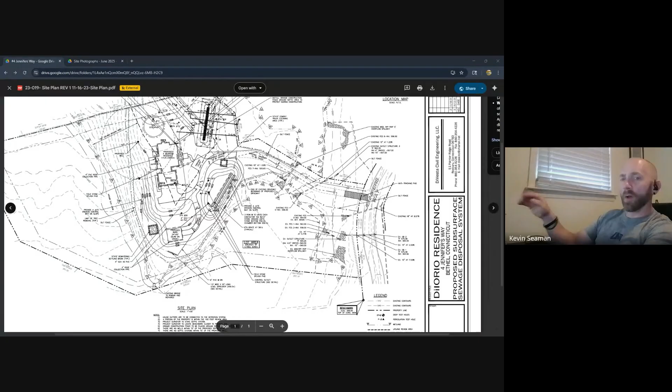Excellent. So just to clarify, the area of the property that was cleared - it was always the applicant's intention to clear cut the majority of the property, and that's what this commission had approved. That wasn't an issue when I went out there, it wasn't a flag that was raised to me.

For this commission's understanding, the prompt for me going out there was so the applicant can ultimately acquire a certificate of occupancy, a CO. So they can go to whatever insurance agency they're looking for coverage and say, I have complied with everything the municipal agencies at Town Hall have approved me for - the septic system, the single family dwelling itself, and the land use commission approvals, i.e. you guys.

So I go out there, I received an as-built survey, and I received a letter of substantial completion from Doug DeBesta. Both of those are in the Google Drive. I don't have any issue with what those show.

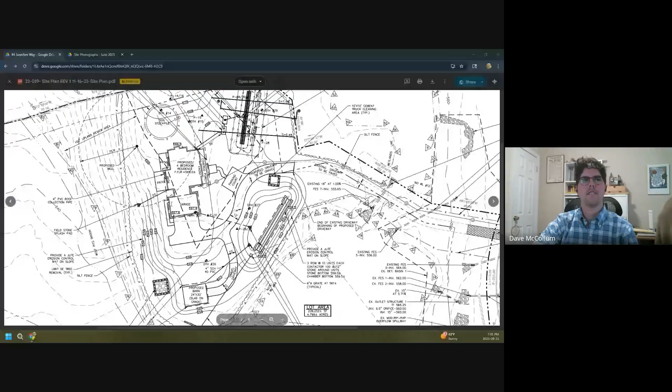The part that caught my attention, however, was - oh, you can't see my cursor? Let me try resharing it again. Okay, that's better. Can you guys see my cursor now? We see you, oh there we are.

Okay excellent. So the area that Mike is trying to share with you guys is this part of the property that is behind, due east of the completed single family dwelling, where there was some grading that was proposed and approved to be done, to bring the area that was proposed to be filled back in line with what the existing contours are. That's what Mr. Diorio is describing to you guys. So that's the area I'm focusing on in the photos I'm going to share with you.

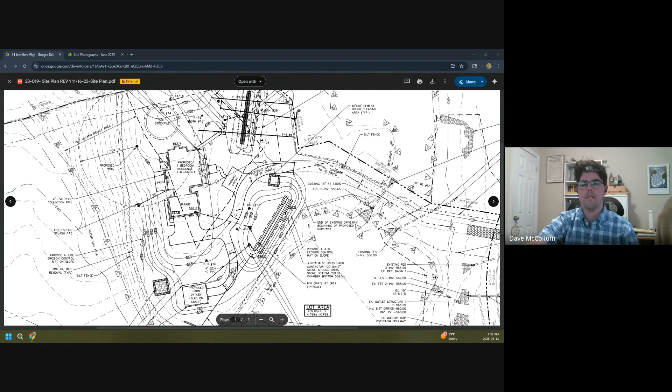Okay, let's bring up the photographs. Let me know if you guys can see these. Yep. Okay, so this gives you as accurate an idea as I could show through a photo of what has happened, or what the final conditions are, and compare that to what this commission approved.

When I went out there, based on what I saw, the area that was proposed to be graded out here - my observations suggest that it's different. And that's not for good or bad, it's just an observation. It is worth noting that there is a silt fence line that roughly follows the water course, extending north-south on the property.

Just for this commission's clarification, there did not appear to be any immediate concerns in the way of adverse impacts to the water course out there. Okay, the silt fence was operating.

I noticed in this picture that the silt fence seems overrun there as it is.

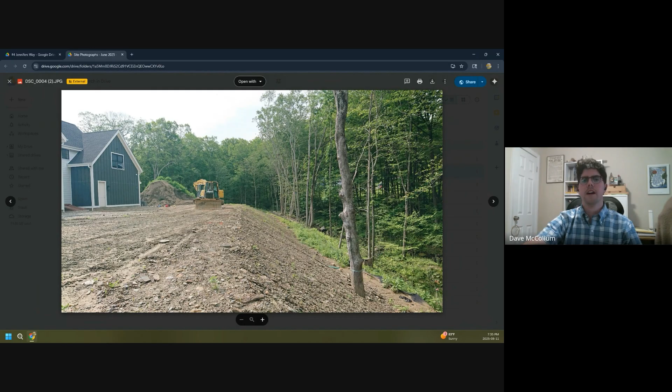That is a good question. Let me try to find... I saw a photograph with the measuring tape. Does it go past the house to the north? The grading?

So my measurements weren't based on comparison to any other structures that were out there. I did mine based on what the site plan showed, and when I measured out from the corner of the garage to where the flat area extends to, going due east, it measures roughly 42 feet.

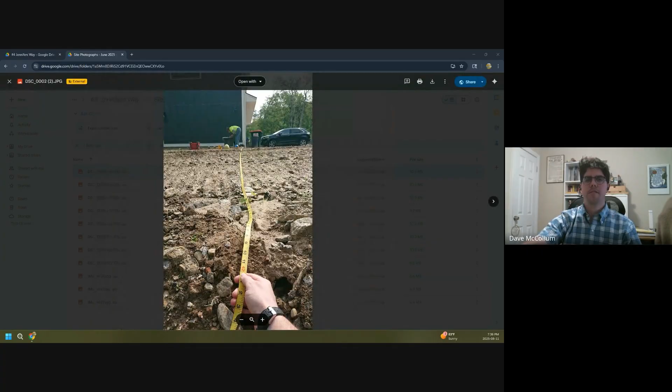The comparison you guys should make is, okay, that's a number, but the context is where is that in relation to what this commission approved, and what difference does this ultimately show? So I'm trying to find the scan that I made for you guys.

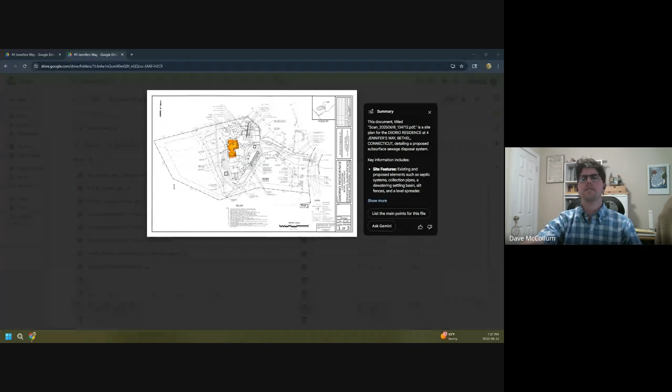Okay, this house, explain it, Dave, right? Can you please tell him? Yeah, thank you. I would, can I just finish what I have to say, and then I would welcome any response that you have.

So I overlaid the as-built survey that the applicant surveyor submitted to show us where the house is going. No issue with that at all. It seems to jive pretty well with where they had originally intended the house to go. So not an issue for me.

The point that I had expressed was, okay, let's take where the house is, because we can see that, and let's try to get an idea for how far off from this corner of the garage, which is where I measured, to where the slope begins. Looking at the site plan, that number's roughly 15, 16 feet, I think is what we came out to. It's maybe a little bit more than that now, because the house looks like it shifted a little bit to the south and to the right, so it's a little farther away from the silt fence section here that you guys all saw in my last photo.

So the prompt for me to do this was, okay, I can authorize some minor changes, emphasis on minor, that an applicant chooses to make in the field, especially when it's beyond the regulated upland review area. If it's really inconsequential to what this commission reviewed, I'm not going to entertain it before you guys. I want to try to streamline things and keep them moving. So in those circumstances, I just handle those myself.

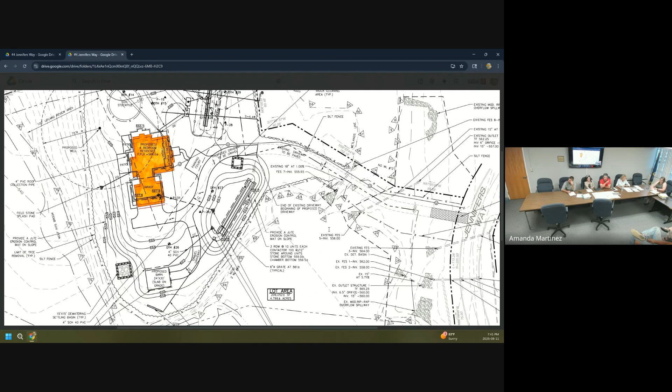The level, looking at the flat side, the bottom of the slope that was changed—is it still at the same location? So the end of it's still where it is. You basically went out about 10 more feet flat with a little pitch, it looks like. So that slope is a little greater, and that's what we're talking about.

We have a bond in place for erosion sediment control, which we hold until it's established. Agreed. I have to say, being on numerous construction sites, this is not unusual.

It's not unusual to have an extra 10 feet around the house flat. With building plans, you try to get as close as possible to build them, but they're still a guide to express what you're trying to do and how to do it. It would have been nice if it matched exactly, but every building will have some type of modifications to it, because as you're working on it, things change that you cannot anticipate.

I think my question is, the plan the way it is—number one, does it affect neighbors, does it affect the water, or anything like that? And number two is, would I have approved it being the way it's done now? That's what I look at with something like this.

I think safety-wise, it's better to have more in the backyard, because if people are back there, you have a backyard, you're not falling off a cliff. I would advise, I don't know the pitch, something like a fence, some border there. Can you show the picture again, for safety—that's all. But again, that's my two cents.

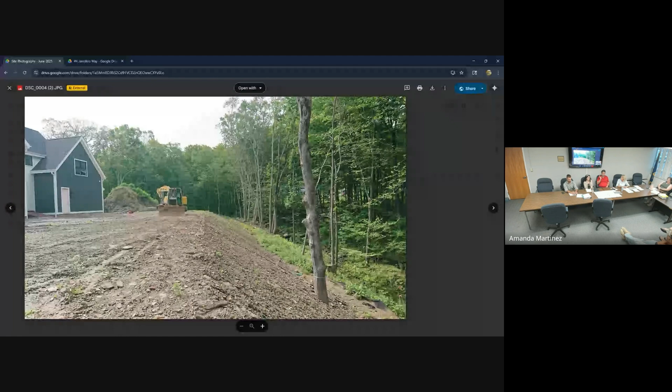I think it would favor for Dave, whoever, maybe - I don't know how long it takes. I have trouble growing grass, trust me, I'm trying. When it's seeded, grown, finished, if you can take a picture and send it to us. So yeah, just - can't we go out and look at it?

In order to go out and look at it, we need to organize an official site walk. We need permission from the owner, and it'll be closed by then, so we usually do our site walks before. We could request that. The adjoining property is Bethel Land Trust property.

We'll just reserve to go see the site. It's a little ways off from the property line, south end of the property. People walk through there. You can-

Because not on - just for the record, that's Don Good. I have to do that. Don Goodrich speaking, former chairman. All right, so

Dave, where do we go from here? Well, what is ultimately being sought is, for lack of better words, an okay from the board that the applicant can go forth with the modifications that they've made. I'll go ahead and take a read from everybody on how they feel about that, whatever they haven't voiced yet.

I'm gonna ask you though, are you comfortable with the way this has landed? So the distinction for me is what work was done. Is it stable? Is it adversely impacting any on-site regulated wetlands? And does it increase the area that the commission approved to be disturbed? I'll try to answer my questions in reverse order.

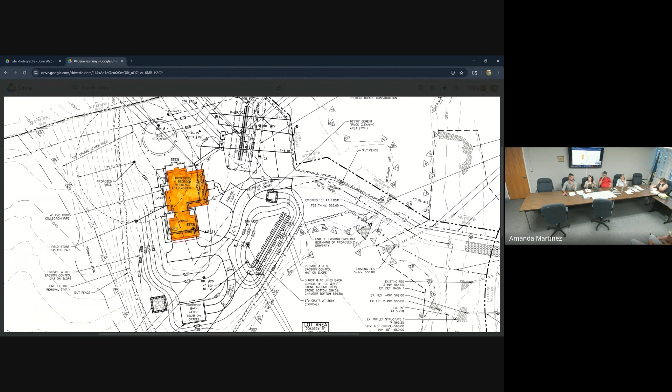There should be a motion made. This commission should first come to a consensus on whether or not to approve the modification as it's been presented to you guys tonight. Then you should formally make a motion on whether or not the commission is okay with this, with the modifications, if there's any conditions that need to be made, or if the commission feels otherwise, they should indicate that.

Thank you, sorry for the interruption. You wouldn't need to draft anything in addition to what we already have, as long as we give our approval? Well, assuming we give approval, there's nothing else that needs to be drafted or signed for next meeting. This could be resolved today.

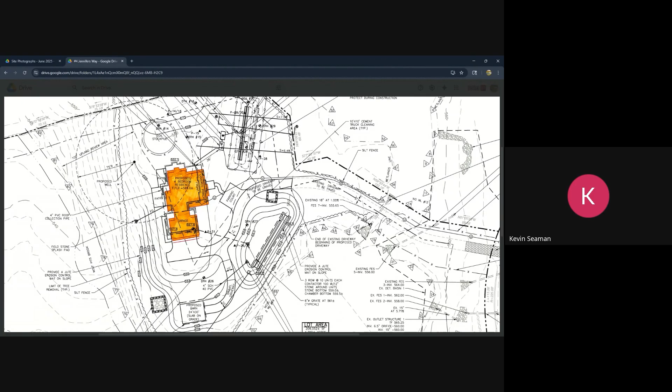Yeah, that's the way I would read it, Kevin. If I'm looking at the regulations, it doesn't say anything has to be done in writing, like a formal approval per se. I would add something to the file to reflect this commission's decision, but I don't think it would be anything you guys would have to read beforehand, just so the language is set. Agreed, that's what I understood too. I just wanted to make sure I didn't want to make the assumption of being correct.

Dave, I'm not sure about this. Maybe this isn't personal. Is it appropriate for Terry to weigh in on this? Probably not.

I don't see why she couldn't participate on this. I understand that while she may not have been part of the original application per se, it's a modification. It's not like Terry's coming in at this at the 11th hour. This is just being presented for the first time to everybody tonight.

Okay, fair enough. So then, Terry, if you want to vote, you may. If you're not comfortable, you can abstain, and that's entirely up to you. All right, so can I get a consensus? How are we all feeling? Let me start on the screen.

Kevin, how are you feeling? I'm feeling like an approval is definitely adequate for this. I really don't have any questions or issues with what's happening. Thank you, I'm going to just take the consensus and then.

I have a procedural question. Dave, I have a procedural question for you. What does it mean? I understand we can vote to approve. What are the ramifications if we do not?

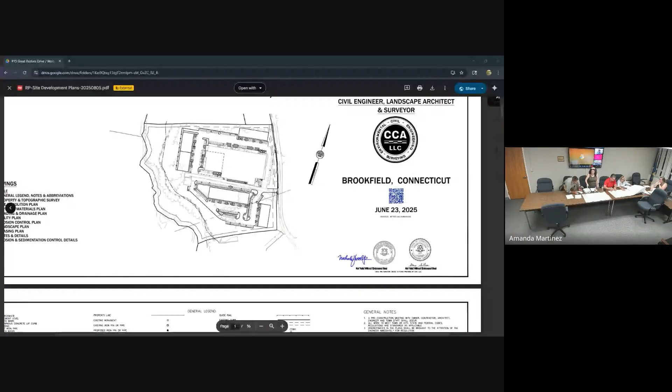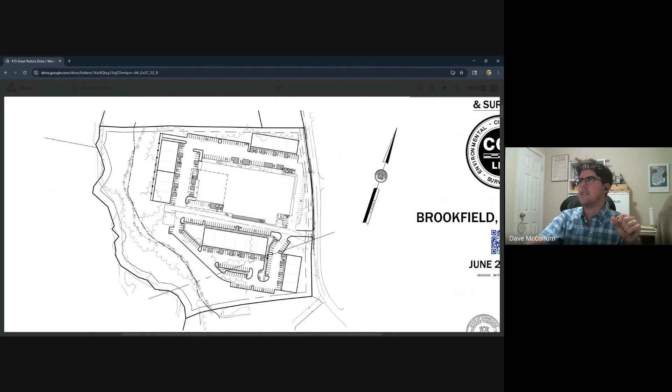I will offer some comments for clarification. I'm not trying to present the application in any way, but the only part of this application or this site development plan that you're focused on is what is in this area right here, because this is what's in Bethel. Everything else to the north here is in Danbury. That's why this property has a Danbury address, because that's where the driveway is, just over the line in Danbury.

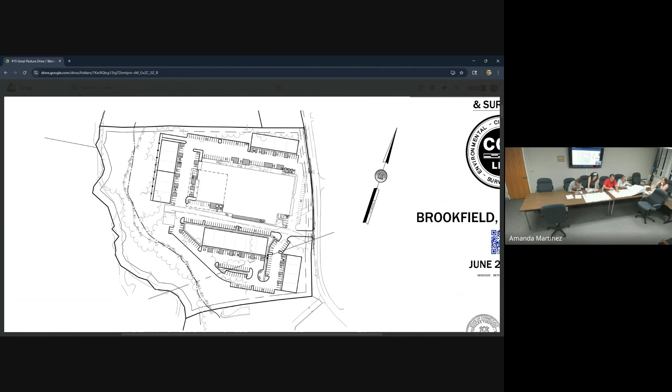Dave, help, is this a new building or is this a building that's there? That's a good question. Some of it exists. I know it's an existing building, and they're building more. So the existing building is here, okay?

I don't see the cursor. Sorry, can't see your cursor. Sorry, the one concrete block, building number 15, is there. Hang on, recognize it. Okay, can you guys see my cursor now? Yes.

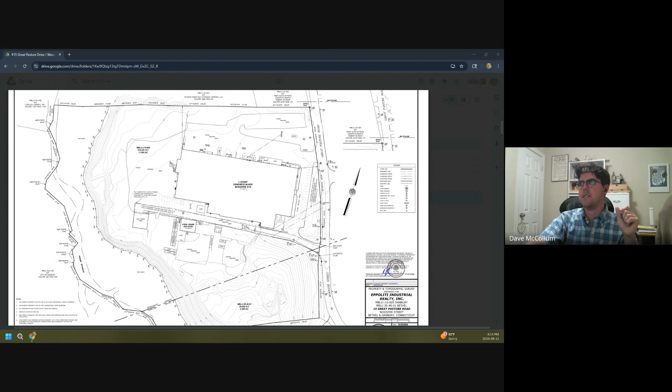So the existing building is here. So what they're looking to do is keep the existing building as it is, and then add 4 smaller buildings around it. Only one of these is in Bethel, the southernmost one here, proposed building 4. This is the only part of this application that you guys have purview to review, because the town line is right here. Here's the buildings.

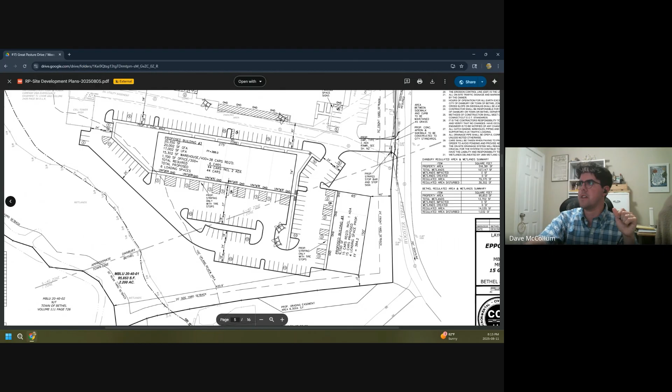Where's the one that's supposed to be here? Is this the town line, right? So the buildings in Danbury, Danbury reviews the rest. But the parking- oh, is that true, Dave? The building actually isn't in Bethel, but the parking is? No, there is a building that would be in Bethel, here, the proposed building. Okay, you put this building, correct?

So, furthermore, this structure is not within the regulated upland review area. The only portion of the property that is due west of the dash line here, of the 100-foot upland review area line, that's your URA. Your wetlands are way down here.

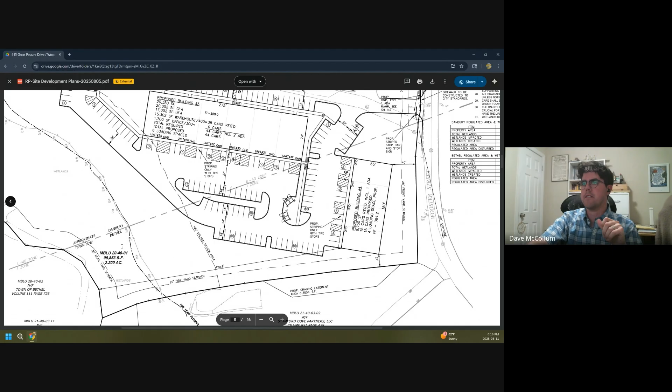If that's the case, because I see where the wetland review area is, I see the level of disturbance, I see where the building is in relation to the Bethel property line, does this technically fall under our jurisdiction? Yes it does, because the parking lot is now within 100 feet.

Right, the parking lot extends back to it. The building may not, but the parking structures do. So it's the associated improvements that are really your purview, being the driveway, the area of the property that would get regraded, and any stormwater or groundwater that would be altered as part of what is going on with the rest of the properties here.

So basically, we're here tonight to just familiarize ourselves with the big picture of what's happening. They're now presenting. We have to take a look at this and decide whether this is going to be site plan review or public hearing. What's the use of the site?

Light industrial is how the applicant categorized it. Do we know the name of the business that's occupying the existing building? No, and to be honest with you, that's not really of consequence, because the existing building's in Danbury.

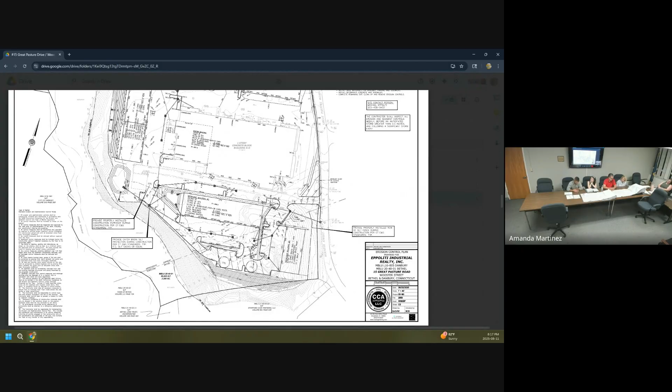I will say that there's a concurrent review being held by Danbury's Environmental Impact Commission. I can't recall which process Danbury's EIC opted to use to review this application, but the public at large wouldn't be at a loss to weigh in on this, either from the Danbury side or from the Bethel side.

Just to be clear, this is also going to go before planning and zoning. Your focus is on what the regulated activities are, which in the grand scheme of things, compared to everything else going on these properties, appears to be pretty small -- this tiny little triangle right here, actually.

Right, that's the area for the driveway. You also have the grading, and you'd also want to consider any changes to the groundwater hydrology for whatever that would be worth as part of the site development changes.

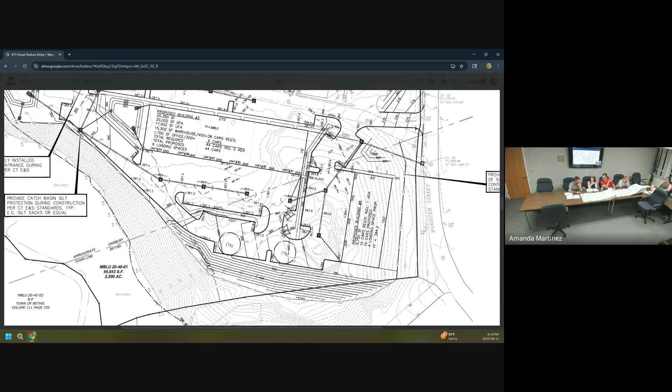Well, that's in our purview, so we have to -- what map are you on there? This is page -- yeah, but that's connected to bottom this. It's sheet C2. Two? Yes, sheet C2. Oh, these are all eights. We're on the same page as you. All right, yes, so that's what I'm looking for, the triangle right here.

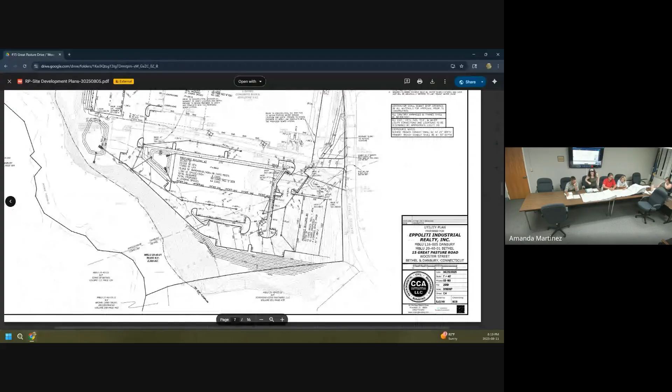That one, yep, is what we're reviewing. I'm just showing you -- this is Bethel over here, and this is where the 100 foot limit should be. I would think we should put trees right here, so I'm serious, that's the limit of review -- parking areas that should be shaded. They should plant in the islands.

Kevin, are you feeling like site plan review or public hearing? Apologies, I was on mute. I'm leaning towards public hearing, but I can be swayed in the other direction, so I'm not hard sold on that, but I am leaning towards public hearing.

All right, Nico, what's your feeling? Public hearing, with the risk of -- okay. So that's you, Pat. I have a question about the public hearing.

They're literally gonna input on a 20-foot triangle? Because everything on it, the building, we have no purview of that. They're literally gonna input on a 20 foot triangle. That is what we are. Okay, so are you feeling public hearing or?

Wait, I thought there was that extension. Sorry, Pat, to interrupt you, only because I'm looking at it -- does it also include that grading area to what I believe to be the south, or is it really just that little 20-foot area?

Am I understanding this correctly? The 100-foot review area bisects the parking lot there. And if you look at where the 100-foot review area goes with the Danbury-Bethel line, there's a tiny little triangle where... this doesn't show the grade. Here's the site grade. The grading, it's a different area, it's a different map. It's elevated, right there, look.

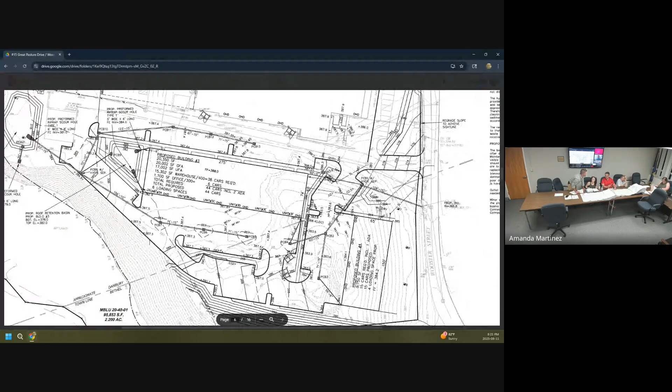Oh yeah, they're cutting. Can everybody follow my cursor again?

Just to be clear, the only portion of this entire project that is within Bethel is what is due south, on this side of this dashed line, okay? The only portion of this property that falls within the 100-foot upland review area is whatever is due west, on this side of this dashed line, okay?

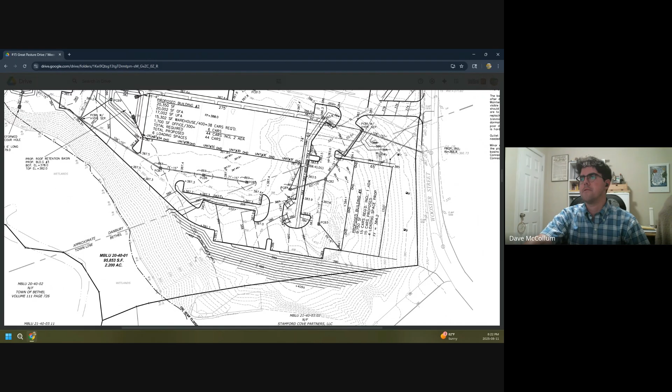So you're looking at a small portion of the proposed driveway/access way, and then whatever area would be regraded here, and a little section here associated with that. There aren't any stormwater management system components shown to be in this area. If you want to get an idea for where they are going to go, that's what this whole plan is here for. So the only other thing you could possibly consider changing in this area is what's going on with the groundwater. And in the grand scheme of things, as staff, I'd think those are going to be comparatively minimal.

If this commission feels so strongly that a public hearing is appropriate, you have to make sure you iterate your reasons why. But otherwise, it would just be a site plan review.

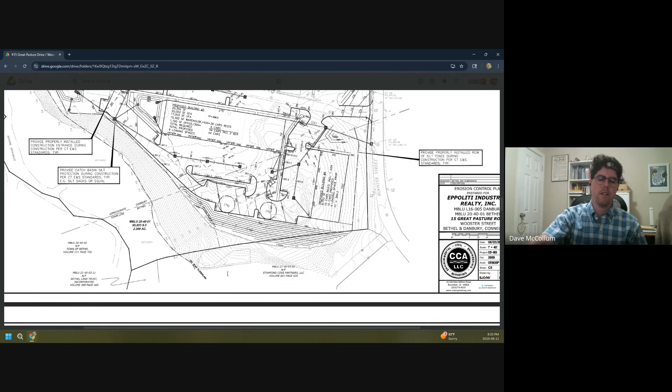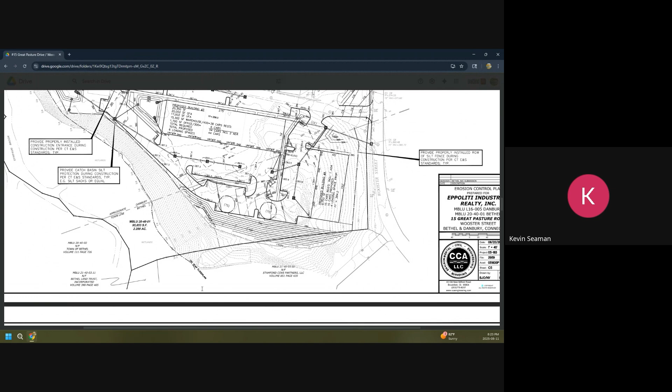No, I'm gonna go with site plan review. I was under the impression that a larger portion of that grading area on the south was impactful within our purview limits, but it is obviously not. I misread the cut-through section of the wetland review.

No worries, site plan review from me. Thank you for outlining that, Dave. No sweat. Nico, do you still feel the same? We can do the site plan review. It's good, it's here for this public hearing.

Site plan. All right, so I would also feel site plan would be appropriate. And then I would entertain a motion to accept the application.

Do we even have a full application? Dave, do we, sorry, take this? Yeah, I'm sorry, we have a lot of novel stuff tonight that I haven't had to deal with before, so I'm looking to you for guidance frequently. Now, I do anyway, but now I'm making an excuse about it tonight. So, because I'm not a proud person.

So do we have a full application? I know there was stuff in the draft. Why don't we go through it, just so you guys can see. Are we here tonight to vote on whether we accept this plan and how we accept it, or are we going to push that to our next meeting because we don't have a full application?

So you have, let's see, a development report which includes a letter from a soil scientist. You have your inland wetlands application. You have the site plans that we went through, and you have a stormwater management system report. The only omission, if you want to call it that, would be, let's see here... oh no, I'll take that back, you do have a topographic survey. So I would say this commission has everything as far as covering the initial requirements to accept an application.

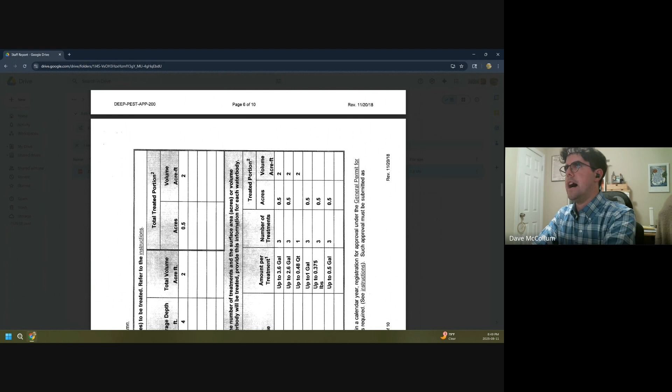The procedure, as I understand it, is when a property is going through that process the first time, that's when you get that FYI form that looks like that. If it's a repeat treatment, we just get a little email, a snippet from the Pond and Lake Connection or whoever is doing the treatment, saying, 'I'm following the application I applied for previously with the state, and I'm going to do my treatments on or around this date.' That's what you guys see on the agenda here. Pretty self-explanatory, not really much you guys need to do in the way of reviewing this.

The other two things I would follow up with you guys on are under commission comments, so I'll wait until that section. But happy to answer any questions you may have.

Any questions for Dave on the staff report? Yeah, Mike, Kevin.

Yeah, thanks for looking into that. The reason I am concerned is, so do we have these to look at that show what the chemicals are going in and the quantities?